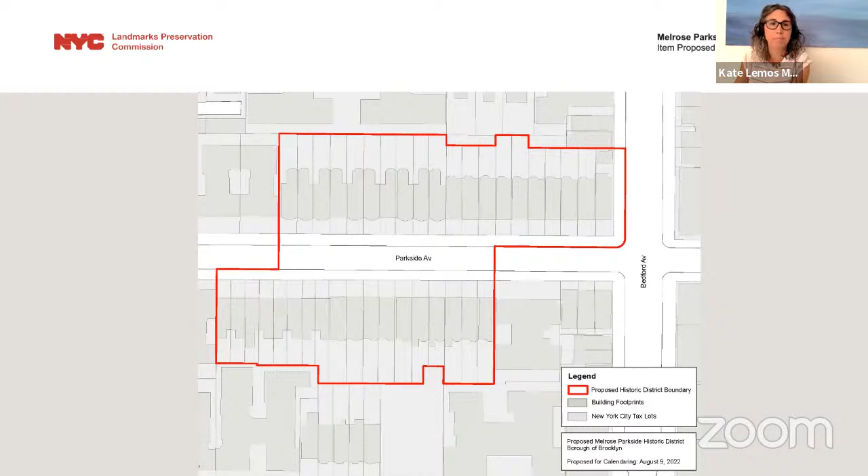The proposed district is located on Parkside Avenue between Flatbush and Bedford Avenues in the Flatbush neighborhood of Brooklyn. Of the 38 houses within the proposed district, 20 were constructed as two-family duplexes, sometimes referred to as Kinko houses, a distinctive residential building type that originated in Brooklyn, an example shown here on the left. The other 18 houses were constructed as single-family row houses. The proposed historic district has been identified through surveys and in response to a request from property owners to evaluate it.

This request was accompanied by letters of support and a petition signed by Parkside Avenue property owners. Staff reviewed it both on its own and within a broader study of the neighborhood. The in-depth study found that the proposed district stood out within the neighborhood for its highly intact architectural quality, and in particular for the group of Kinko house duplexes with their artistically designed facades, which we consider among the finest representations of the type in Brooklyn. In the staff's evaluation, the remainder of the block and adjacent blocks contain buildings in a variety of scales, ages, and levels of architectural quality and integrity, which do not contribute to a strong sense of place, and therefore we propose a district focused on the row houses, which you see here.

We held an owner meeting last year and have received generally good support from property owners as we've continued our study.

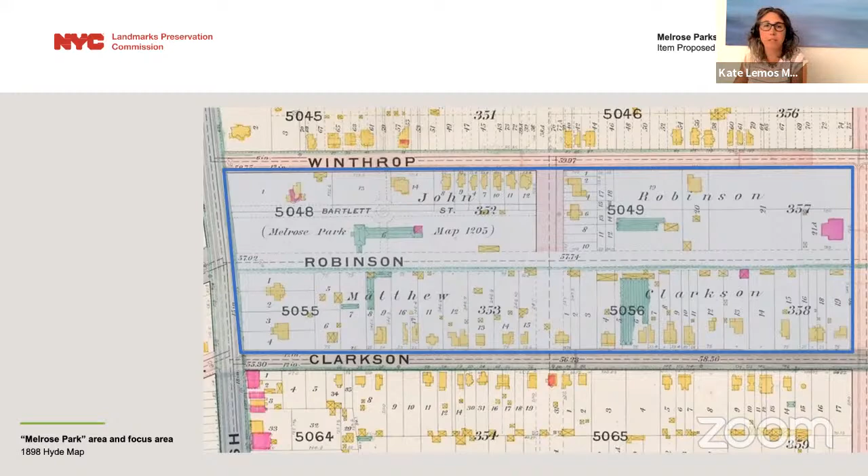The projected development went unrealized, and in 1886, Bartlett sold most of the property to the wealthy brewer and speculator William Brown. Already active in real estate development in Brooklyn, Brown's son, William Arthur Alexander Brown, began the transformation of the family's holding following his father's death in 1905.

Around 1908, the long-mapped Robinson Street was opened, and Brown petitioned the city to rename it Parkside Avenue for its connection to Prospect Park and Ocean Parkway. In addition to the 2 rows of duplex houses designed by Benjamin Driesler, which were completed in 1910, a row of single-family no basement houses by Driesler were in the process of completion in 1912, shown on this map also.

The undeveloped portion of the property on the north side was sold to developer Eli Bishop and Son in late 1913, and by 1915, development within the proposed historic district was completed there, with a row of American basement single-family houses designed by Axel Hedman.

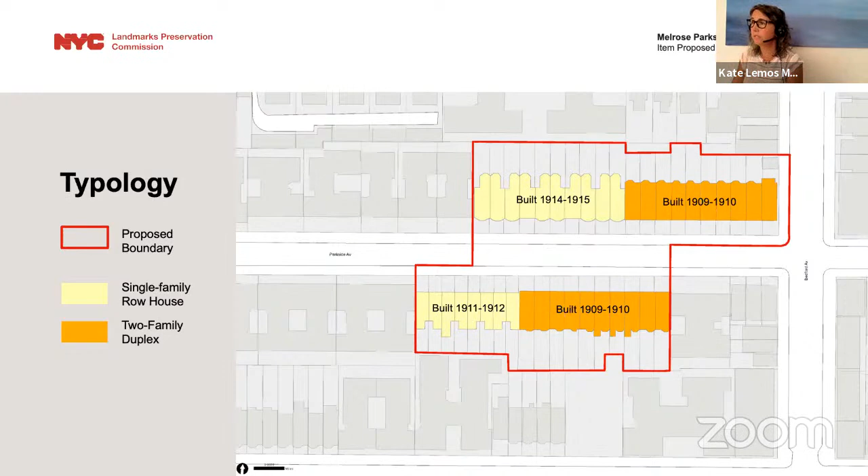This map shows the historic typology of the row houses, with the 2 rows of Kinko houses by Driesler built in 1909 to 1910 shown in orange, and rows of single-family row houses that were built subsequently shown in yellow. The apartment buildings on the block were built later for different developers and with lesser architectural quality and integrity, and so are not included in the proposed district.

Following a trend that was seen in other residential communities, some residents began sharing their large apartments with roomers, boarders, and lodgers in the 1920s. And beginning in the 1930s, many of the duplexes were being subdivided into multiple rental units or combined office residences for doctors.

By the mid-20th century, Flatbush saw a large increase in African-American and Afro-Caribbean residents as Black families moved into the area from other neighborhoods in New York, such as Central Harlem and Bedford-Stuyvesant. Central Brooklyn soon became the center of the city's Afro-Caribbean community, and by the 1980s was a major destination for migrants from Caribbean countries. Today, Parkside Avenue continues to reflect the diversity of Greater Flatbush.

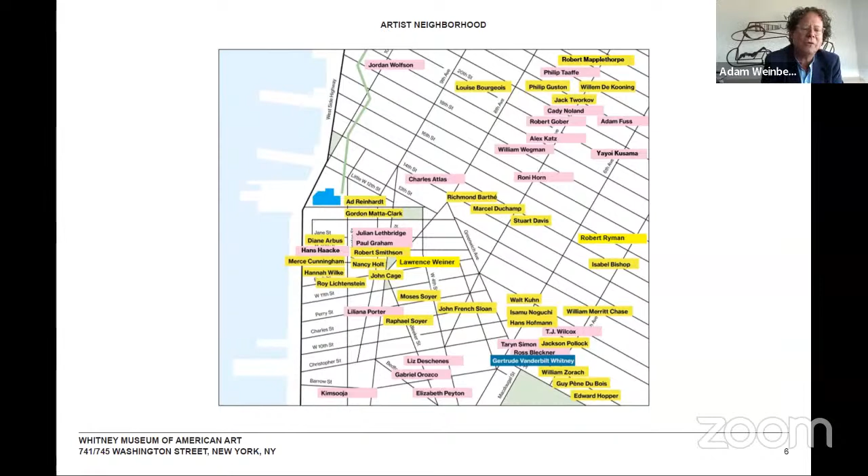Thank you all for the commissioners.

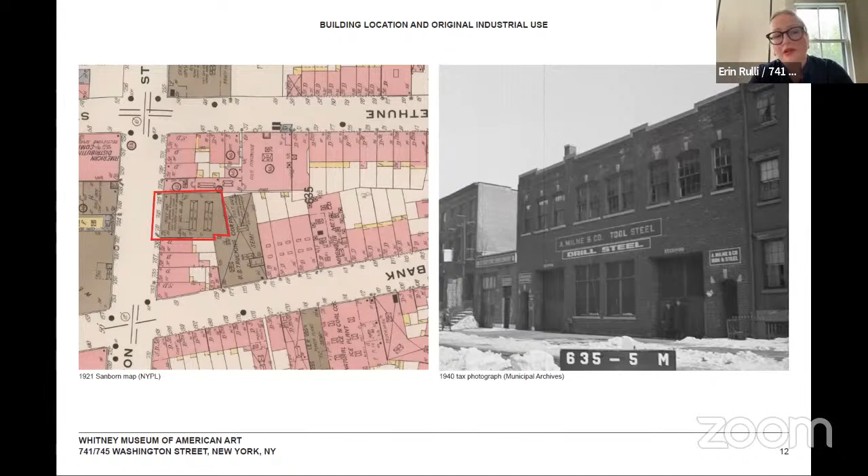Roy passed away in 1997, and since that time, the studio has been home to the Roy Lichtenstein Foundation.

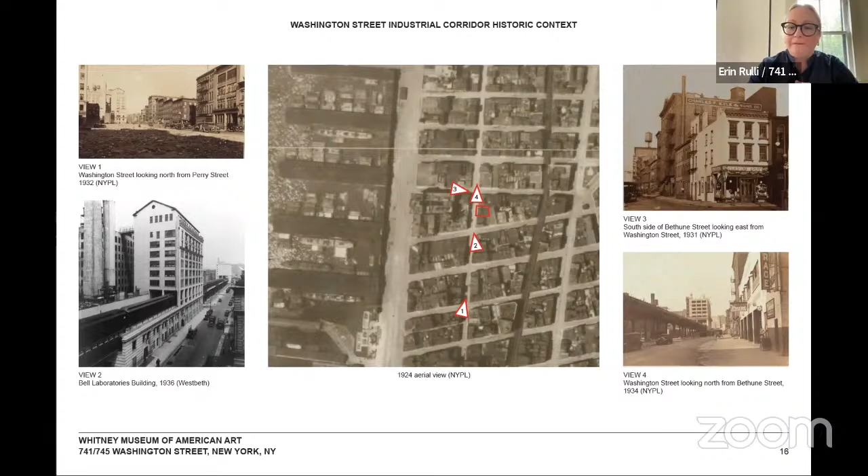I think what's important here is not just the characteristic juxtapositions that we see, but also that commercial building type is not defined by a specific size or scale, unlike row houses and tenements. So we see three examples in the very immediate context of that variety, and I think the addition at 741 does not fundamentally change the legibility of that commercial building type that we see here in great variation.

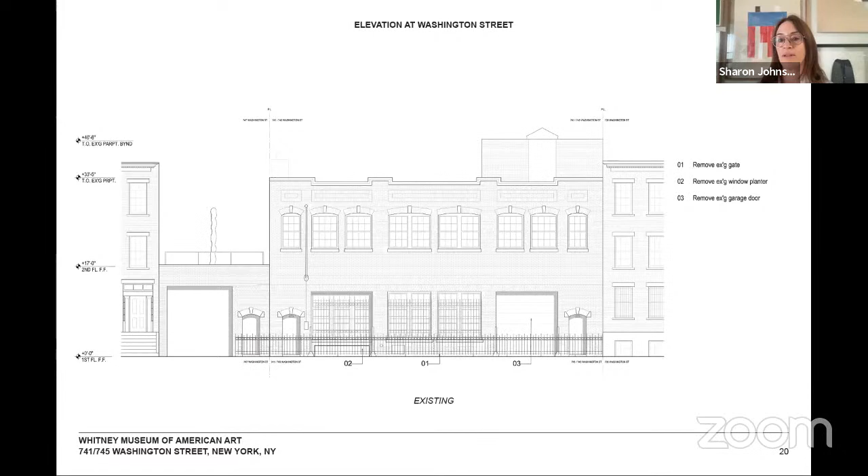Maybe as a way to summarize our thinking, captured in this diagram through four key strategies that we think bring harmony and find the right balance between highlighting and foregrounding the factory facade in relation to the addition. The first, in the upper left, is through use—we're bringing back and balancing the industrial use, used by Roy as a studio, with our proposal for artist studios on the ground floor and the single artist studio on the roof, sandwiched by the more intimately scaled, almost residential meeting spaces on the middle floor.

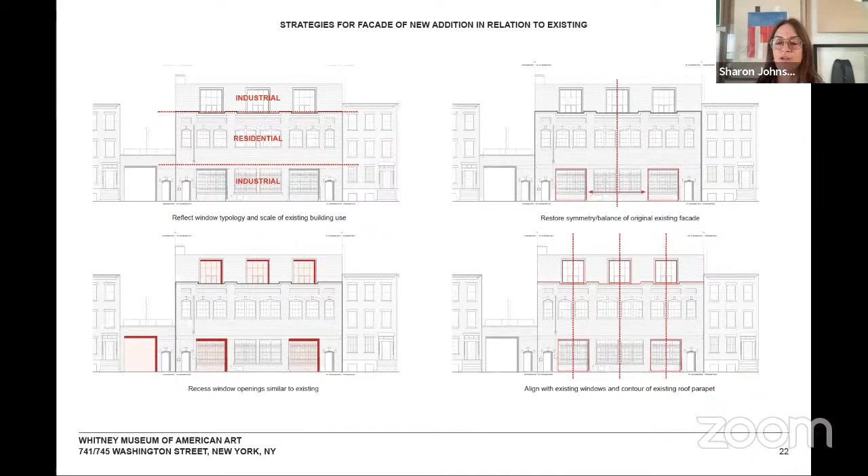That's represented also by the window scales Erin talked about. On the upper right, we bring back an order of symmetry at the base of the building by reintroducing the window on the south opening where the garage door was. On the lower left, repeating a language of recessed windows brings a sense of weight and definition, not only through the brick detailing but through the way the window sits in the facade. And lastly, on the lower right, while we want to preserve the predominance of the horizontal order of the factory facade, we've thought carefully about the placement of the windows, both functionally for the interior of the artist studio on the roof, and in the latent vertical order in relationship to the windows on the lower level of the building.

So if we could go to the next slide. As you've probably heard already, our intention is very much to preserve the lineage and legacy and texture and grain of the historic factory building.

We think our proposal achieves that through the way we introduce the massing. It's a simple elemental form, very much in the language of the existing residence and the industrial elements of the bulkheads, both in our building and some of the other spaces you see in the back of the blocks around this neighborhood.

Also through materials, we're proposing a brick facade, but a quieter brick that allows the texture and variation of the factory facade to remain foregrounded. We're introducing details around the window fenestration intended to respond directly to the function of this space as an artist studio, introducing ample light while balancing the need for wall space for contemporary artists who work in so many different mediums.

Next, I think Erin will walk us through these orienting slides that capture the mock-ups and rendered views, so everyone is clear about the position of the project in the neighborhood, and I'll follow up with some last details. Thanks, Sharon.

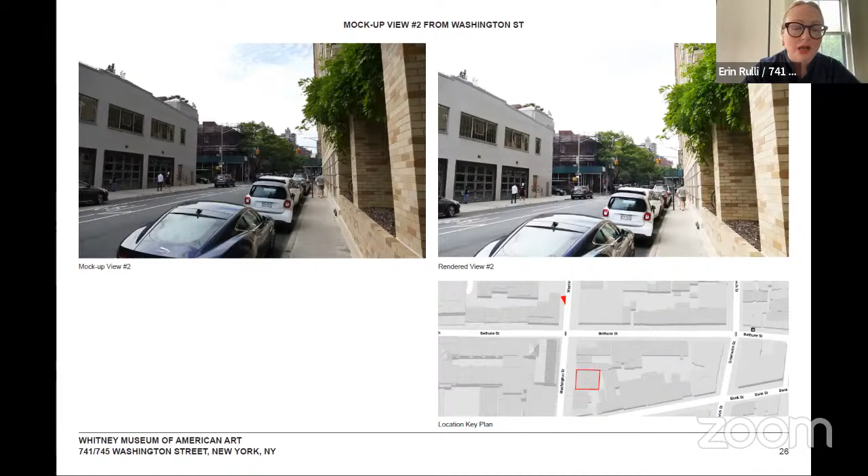Next slide. Moving a bit closer from the corner of Bethune, we see the addition again over the existing parapet line.

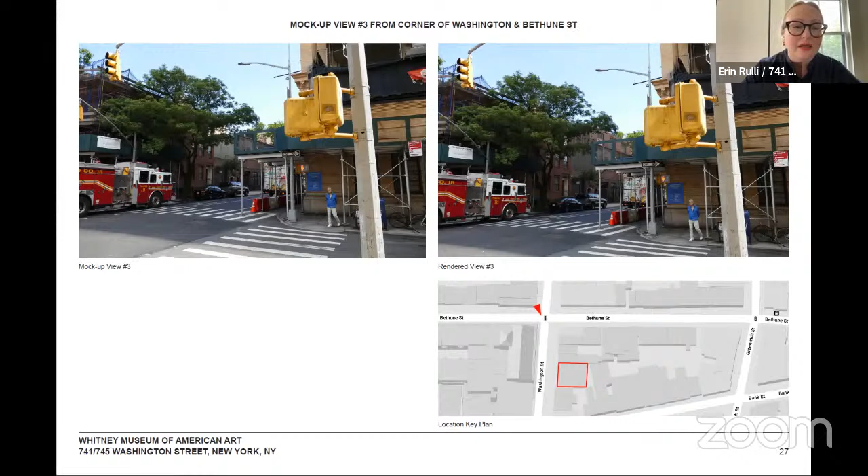Thank you, Erin. As much as we've been thinking about the internal order of the existing building, we've also been looking carefully at the context. What's notable for us is that this is an eclectic scale, materiality, and use. Westbeth is across the street, and it's that kind of variation that offers clues for our approach.

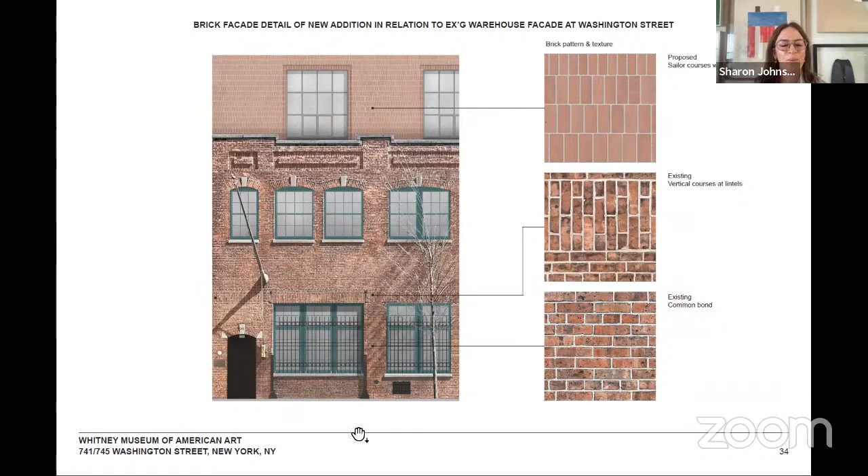You can see how the windows sit in relationship to that beautiful variegated parapet—right in the middle of it, finding that symmetry locally and overall. Also note the base brick is restored below the existing building, part of the subtle details we pick up on to bring back the clarity of the existing building. Thank you, next slide.

We've been studying the brick carefully, looking for a slightly more uniform brick tone to foreground the beautiful texture and vertical orientation of the existing facade, but we're looking for a brick with beautiful craft. It'll be a solid brick given our approach with the cut and vertical order we're proposing.

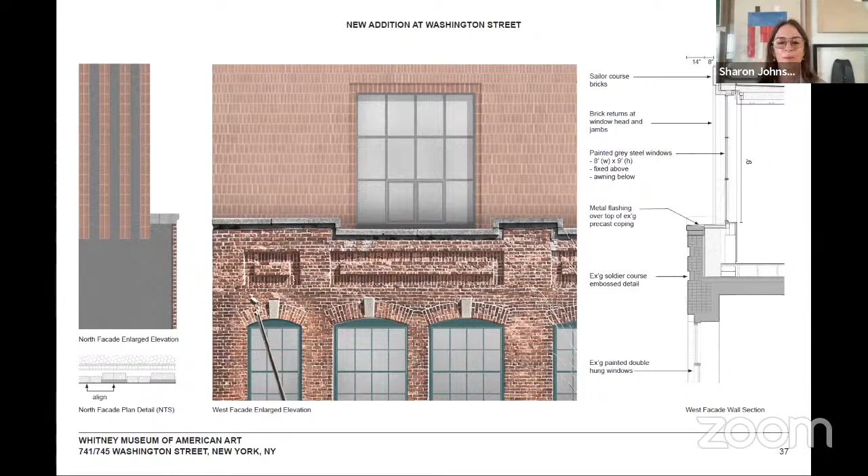The diagram on the left indicates a proposed further detail we're looking at on the north elevation of the studio, to articulate it as a massing sitting on top of that somewhat blind facade above the garage just north of our building. Subtle details that reinforce both the harmony and discrete nature of the addition.

Next slide, please. To highlight some of the points Erin brought up, as rendered here in darker gray, those are the existing walls. There was an existing residence on the second floor, and we've made a lot of effort to preserve that function—the bedrooms and bathrooms in the back—and located the new stair and elevators in the back of the building so their bulkheads are more discreet from the street. So what's on Washington Street on the west side is really just the artist working spaces.

We're extending the lineage of that second floor space below and preserving the open space of the green roof above the ground floor. Next slide, please.

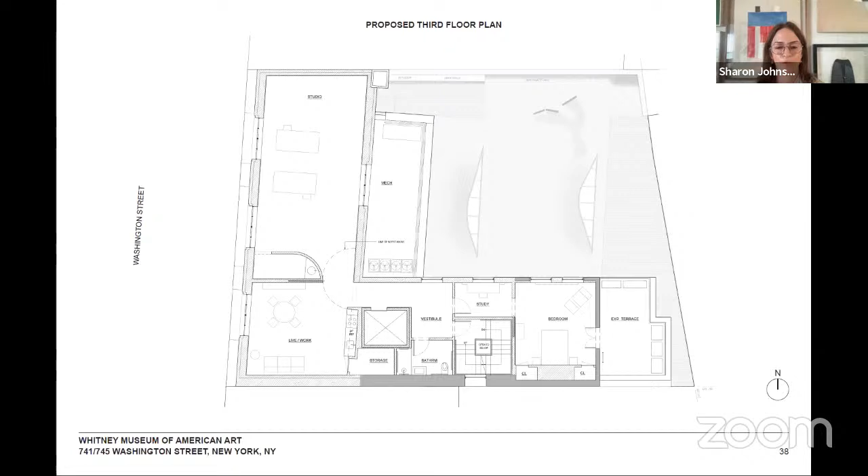Informal meeting spaces are on that middle floor, almost mirroring the residential scale of that floor. And then the artist studio sits on the rooftop. It's an 11-foot clear ceiling, which we think is modest by contemporary artist standards, but works very well within the overall proportion of the building.

Lastly, we made an effort to really simplify the placement of the artist studio for an economy of means, working with the existing structure and the bearing lines of that section.

I think just to conclude, our attempt here has really been to bring harmony with the diverse layers, not only of the building's history, but the urban context. We think by bringing this new contemporary use and building form, it fits seamlessly within the lineage, not only of this building, but also the evolving use of the neighborhood. So thank you very much for the opportunity to present to you all.

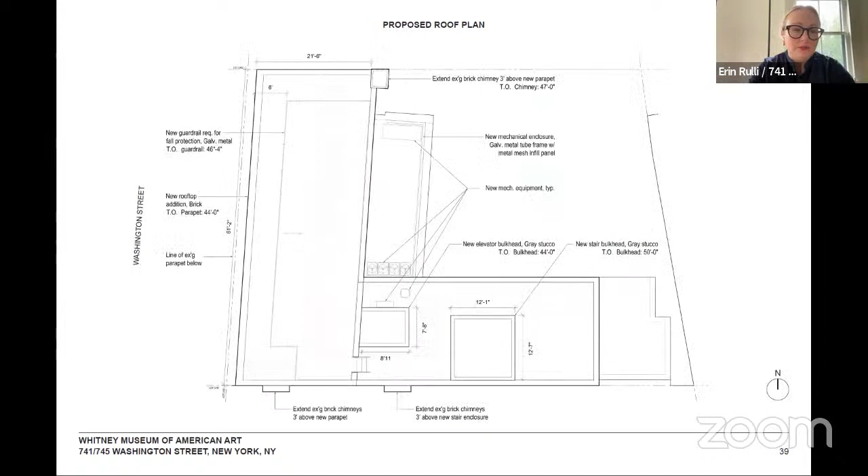This is elevated, so it's difficult to see how much of the addition is viewed from across the street, and I don't see that diagram anyway. I guess I would think of it not as a question about visibility, because it really sits just behind the parapet. It's really a question of whether it's appropriate to have a third floor on this building, and that's the way I would think about it.

I would assume that that third floor is going to be largely visible in its entirety, and we're thinking about this as a third floor to this industrial type building.

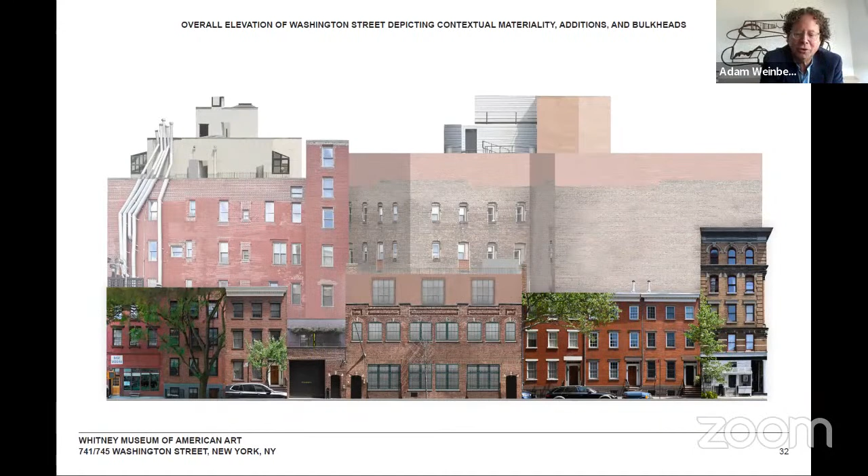You should know we gave a presentation at Westbeth for the residents of Westbeth and the neighborhood and shared a lot of these images with them as well. So we should disregard the block, the row itself, because obviously it breaks up the row. That's the concept, but I think you would be thinking about whether a third story in this context would be appropriate.

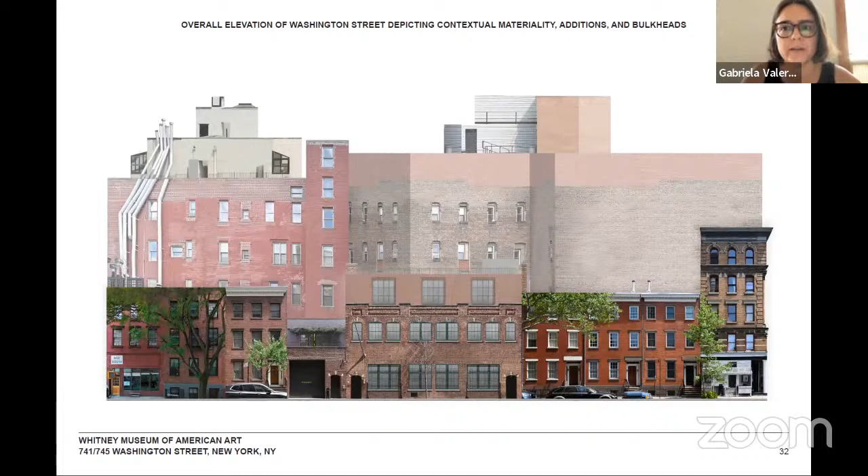Hello, good morning, everyone. My name is Gabriela Valero, and I am here on behalf of Annabelle Selldorf from Selldorf Architects in New York City. I will be reading her letter of support for this docket.

Dear Sarah Carroll and commissioners, it is my sincere pleasure to write this letter of support for the Whitney Museum of American Art's application for modifications to 745 Washington Street in Greenwich Village, to accommodate the building to be the permanent home of the Whitney's Independent Study Program, ISP. I am writing both in my capacity as an architect who has designed numerous similar projects in historic districts in the city, but also as a 20-year-plus resident of Greenwich Village.

I find Johnston Marklee's designs to be thoughtful, sensitive, and wholly in keeping with the character of the neighborhood in scale, materiality, and detailing. The scale of the rooftop addition is modest and driven by the new programmatic needs of the building, including providing ADA access to all levels of the building.

I am also particularly impressed by the very considered selection of the brick for the addition, including its color and coursing. The history of the village as a place of artistic production and inquiry is significant and legendary. Gentrification and changing development patterns have made it unaffordable for most working artists, particularly those at the start of their careers. I cannot think of a more fitting outcome than for the former studio of Roy Lichtenstein to be repurposed for the Independent Study Program.

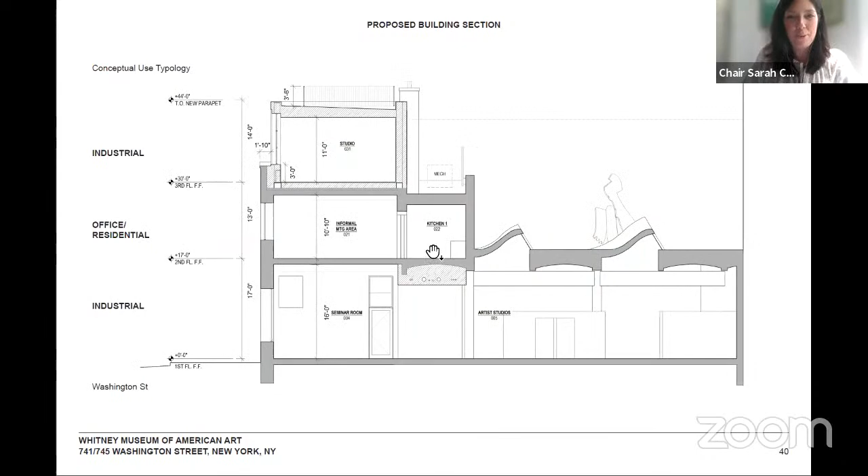I'm truly touched and honored by your words. And I just want a special thank you to Sarah Carroll and her entire staff who were incredibly helpful in giving us feedback in the process. Sarah, thank you for your leadership. Thank you very much. Thank you, commissioners.

Okay, we'll now move to public hearing item number 2, LPC 23-00186, an application for a certificate of appropriateness in the Borough of Manhattan, Block 41, Lot 7504, 70 Pine Street, the Cities Service Building and first floor interior, individual and interior landmark.

This is an Art Deco style office building with an Art Deco style interior lobby, designed by Clinton and Russell, Holton and George, and built in 1931 to 32. The application is to install furniture structures in the designated interior lobby spaces.

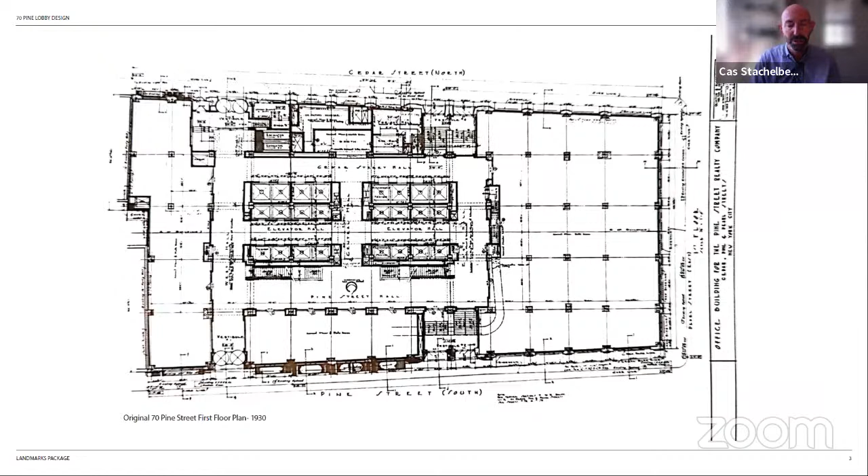The lobby and the building have been recently reclaimed and reinvigorated. Five years ago, the building was converted to residential use, with hotel, commercial, and food and beverage uses as well, so the building is once again a very active place.

The existing plan, as it is today, shown in green, outlines the designated space. The area of work is just in this southern corridor, but you can see there's a coffee shop, a small restaurant, an empty storefront that will help service the cafe, and a restaurant in this location. So there is, once again, front-facing, lobby-facing activity on the ground floor.

Some existing photographs give you a sense of the materiality and range of materials. The floor is a checkerboard pattern of two-tone marble, with remarkable Deco detailing across the walls, faceted cast aluminum storefronts, and a beautiful faceted plaster ceiling. A stair runs up along the south side to the second floor, adjacent to the area of work.

You can also begin to see the uses in the lobby: people passing through with strollers, walking their dogs, coming and going, sitting on benches drinking a cup of coffee. So it's becoming an active place once again, and the proposal really is meant to enhance that energy.

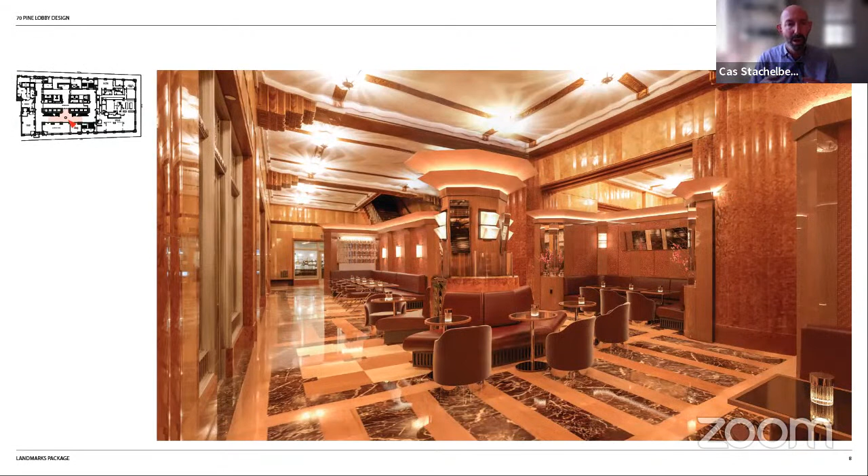Turning to the proposal, this is an existing view in the area of work looking east, in that south corridor, and then the proposal, which involves installing loose furniture, tables and chairs, as well as freestanding banquettes that have no physical attachments to the underlying historic fabric. All systems are fed through existing penetrations in the walls, and all of this has been designed in a reversible fashion.

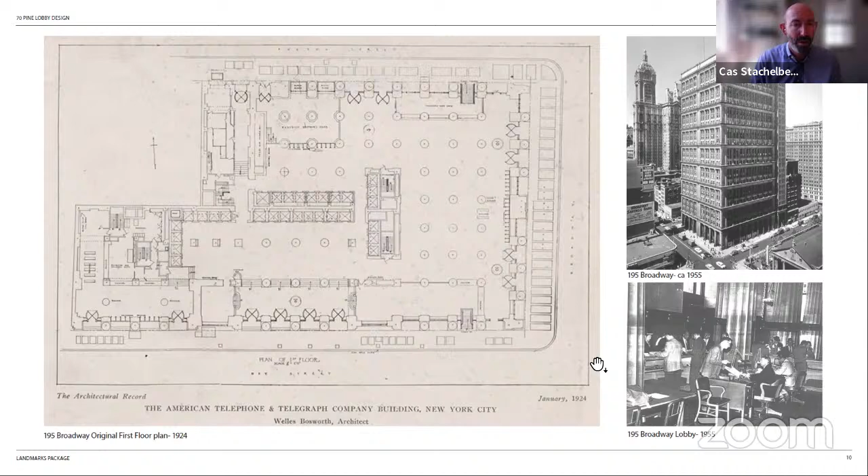This is more similar to the way 70 Pine Street operated, and the energy we're looking to tap into. We also thought it was helpful to look at the way the Commission has regulated some of these interior lobby spaces.

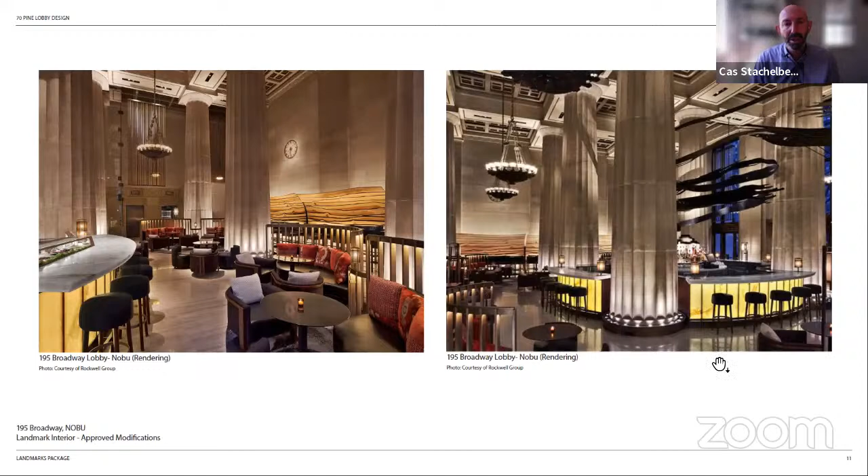This is the lobby of the American Telephone and Telegraph building at 195 Broadway, with renderings of the Nobu restaurant that is now open, where the Commission found it appropriate to have loose furniture, bar fixtures, tall partitions and banquettes along perimeter walls, suspended artwork, all intended to reinvigorate a space that was quite dormant at the time of designation. The Edwardian Room at the Plaza Hotel is another example, where commercial and retail uses through large fixtures have been installed to reactivate the space.

More recently, the Emigrant Savings Bank, where the Commission approved a large art exhibition space in the banking hall that's set to open next month. In the ancillary spaces, furniture and tall fixtures along the perimeter walls help support the new use within the lobby. So the Commission has acknowledged that installations similar to what we're proposing here in support of these new uses can be found appropriate given limited visual and physical effects or impacts.

Hi, I'm Reid, the designer for DTH, the ownership group of the building. I'm here to present the design and give you a bit more info on the details.

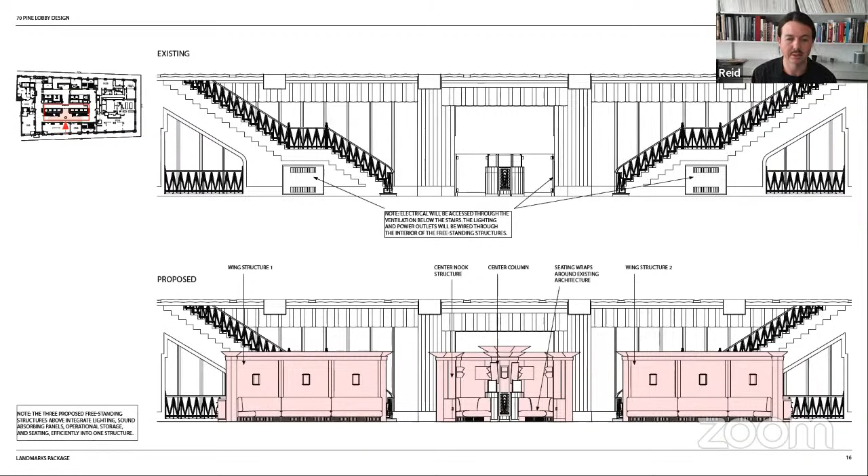Here we have a side-by-side view of the existing lobby with the proposed structure. As you can see, it creates that delineation while still keeping a view to the end of the hall. This space is very narrow, so it's important for us to have these views that extend throughout the lobby while still creating this intimate setting we've been discussing.

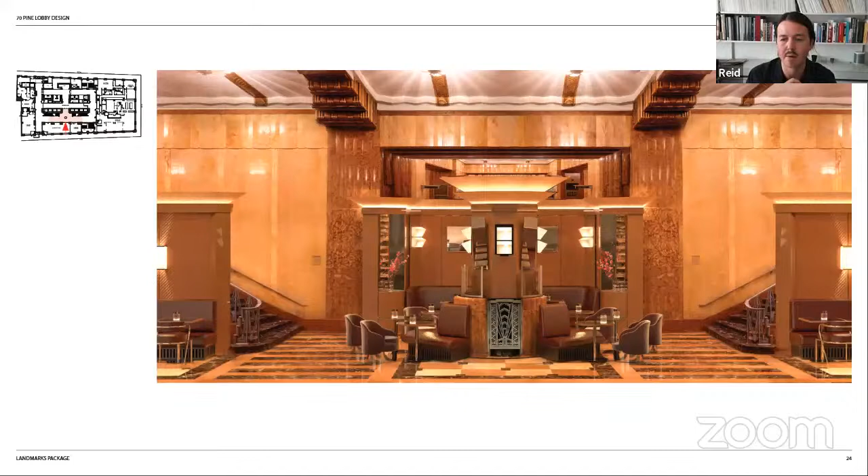Next slide, please. And here's the east wing structure.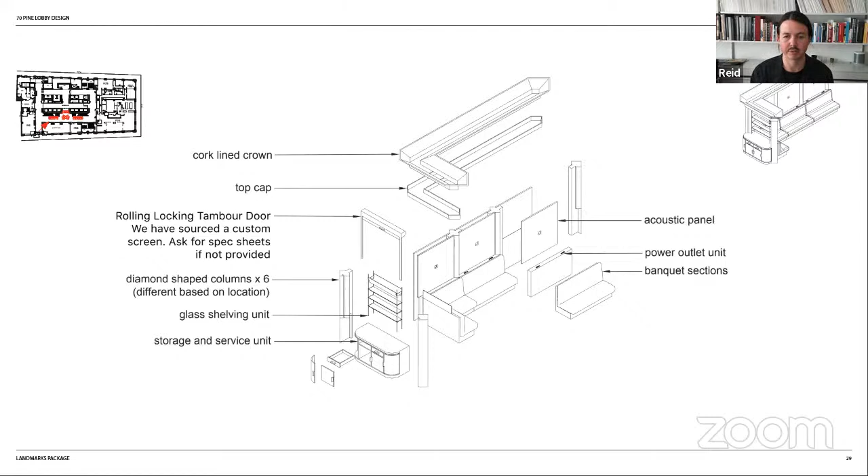Here's some technical drawings of the structures, to give you a sense of how they're built and assembled on site, but also disassemblable, allowing for reversibility. They're made of several parts manufactured off-site and assembled on-site, allowing for disassembly on multiple occasions, like being able to switch out different parts and pieces as needed.

Here's more technical views—I'll zoom by this a bit more to save some time, but if we need to return to any specific details at the end, we can in the Q&A.

And here's the two ends of the space of the proposal. In summary, these are freestanding structures. We paid a lot of attention to designing something that could be freestanding, but also delineate an intimate setting within the lobby, to be programmed for both the existing commercial tenants and the future cocktail bar servicing the area at night, as well as creating a public space that's nice to come hang out, work, or have meetings in.

This will allow us to bring life back into this lobby, which was bustling back in its heyday when it was built, which no longer feels like the case. We want to bring people and energy back into this space, and we think this project does a great job of doing that.

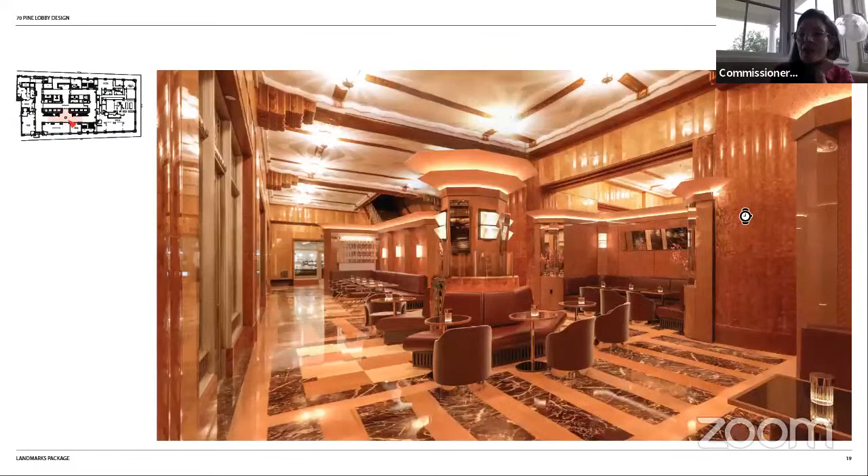So we have some freestanding furniture that is not mechanically fastened to the interior finishes in this one section of the lobby, and this furniture has sort of enclosures or walls to create a space within the space, with finishes that relate to some of the finishes in the interior space.

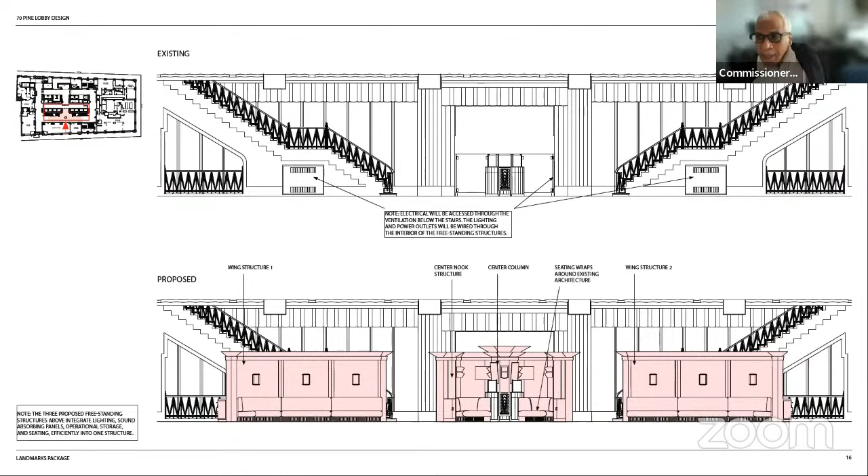The handrail is gorgeous, the stair is beautiful. I agree with one of the comments that perhaps if it was 5 feet, I could accept that as a proportion. So I think the scale of the rooms is too much for me. I would suggest that you do it in scale. Okay, thank you very much.

Commissioner Gustafsson: I think Commissioner Jefferson nailed it. It's this concept of putting a room in a room. The use of the Nobu space as an example did not help their presentation, because it is so conformed to and revealing of the space, as opposed to looking like something that's dropped in to block the views of the space. So I don't even know whether 5 feet would work, but this definitely does not.

Okay, thank you. Commissioner Shamir-Baron? Thanks. I do think that the view we have up here, the top image where we see that kind of symmetrical stair flowing down, is such an important view, even though you can't actually occupy that exact spot and see all of that probably ever. But I think it's very important, and the proposal in the locations where the stairs themselves are hidden or slightly obscured is where I find there is a problem.

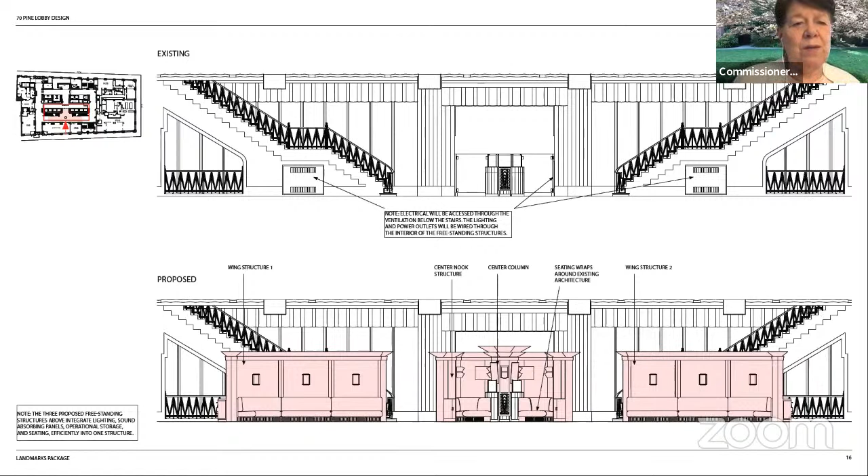I can approve the concept of movable restaurant furniture here, which I think is fine as a use. But these partitions are too tall, and I think they should be largely transparent, in which case you could see what's going on and it would not interfere with the perception of the space. The applicant talked about needing soundproofing, but that could be achieved with a transparent partition as well. So I think they should be lower and much more transparent, and that would achieve their ends and still allow the space to be viewed.

Great, thank you. And Commissioner—the lighting's okay. Okay, great. Commissioner Goldblum? Thank you. I agree with much of what has been said. The appropriateness of the furniture per se is for me acceptable.

However, the scale is completely inappropriate. I'll try to be as clear as I can about what I think are the lines across which this should not cross. Number one, no railing should be obscured. None. What that means practically is that the partitions come down to fit under the railings, and that the end bench closest to where the railings terminate should either become a flat bench with no back, or something else that reveals the railings. The railings should not be obscured.

Two, for me, the center nook, which blocks the view north to the center of the space, is inappropriate because it's blocking that view. Granted, it's not necessarily the most glorious view, but it lends to a sense of space and connectedness that the other changes approved in this lobby have diminished. So having a sense of the continuity of the space, even though multiple uses prevent access to all of it, I think is a very important aspect of earlier approvals and of the landmarks designation of the space as a whole as being a landmark.

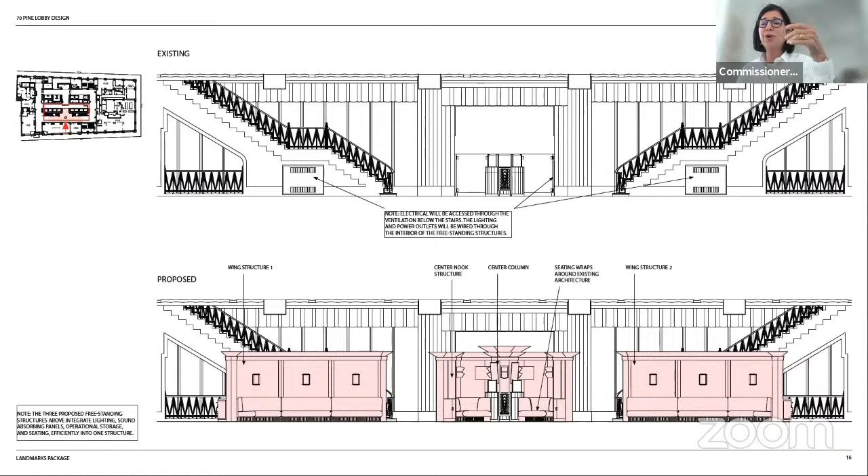Thank you. Commissioner Lutfy. I think all of the commissioners and also the other comments we've received have been right on. I do want to say I appreciate the fact that the applicant has tried to do this in a way to make sure that it's reversible and to tap into existing electric. And they've also been thinking about ways to mitigate and dampen the sound, which is very important in a space that has high ceilings and also materials that sound will bounce off of. But I agree with my fellow commissioners that there are different ways to mitigate sound.

I do think that by installing those walls behind the seating areas, it helps to obscure the wonderful details of the stairwell and the other architecture. So something else has to be explored. And I completely agree about the comments concerning the kiosks. I think that not only is the cornice too busy, but I feel like the whole top of that kiosk has to come off, and maybe it doesn't need the walls per se either.

I do feel like, as Commissioner Gustafsson said, the Nobu example is sort of a beautiful example of how you can utilize a space and accent it and add to it in a wonderful way, without masking it or competing with it. In that particular example, I think it works incredibly well. Also, what page was that? It was just two pages further, very understated. I think it was 51 Chambers Street, also worked very, very well.

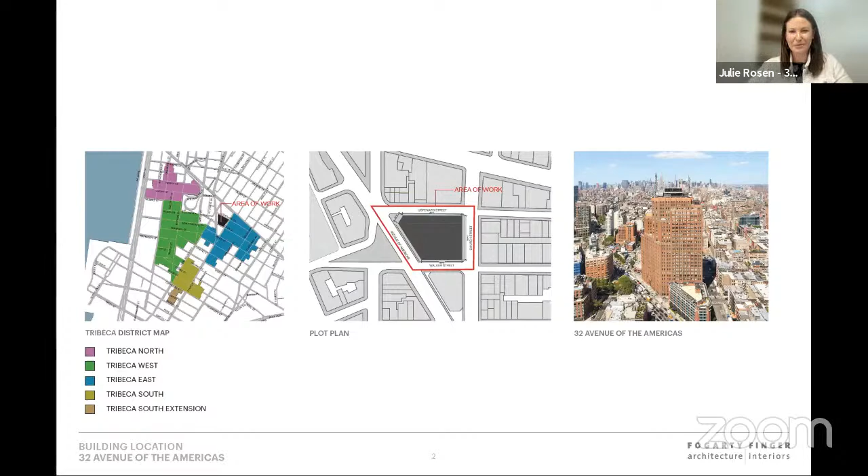The building was constructed in 1930 to '32 as the long distance building of AT&T, one of many telephone buildings designed by Ralph Walker in the Art Deco style during this early 1930s period. Walker constructed a modern interpretation of a skyscraper with a real emphasis on verticality throughout the building's design, with massive brick walls, punched window openings, and a central entrance portal on 6th Avenue. The building was very much designed for a single tenant, both inside and out.

At the street level, the exterior design was very solid, and this aligned with the interior uses identified on the original floor plan, which were all in service to the specific functioning of AT&T. Spaces were planned for a conference room, supply rooms, and even an employment office, and there was no retail along the base of the building. So many of these details and decisions that were once employed for the original single tenant use are no longer meeting the needs of the now multi-tenanted building.

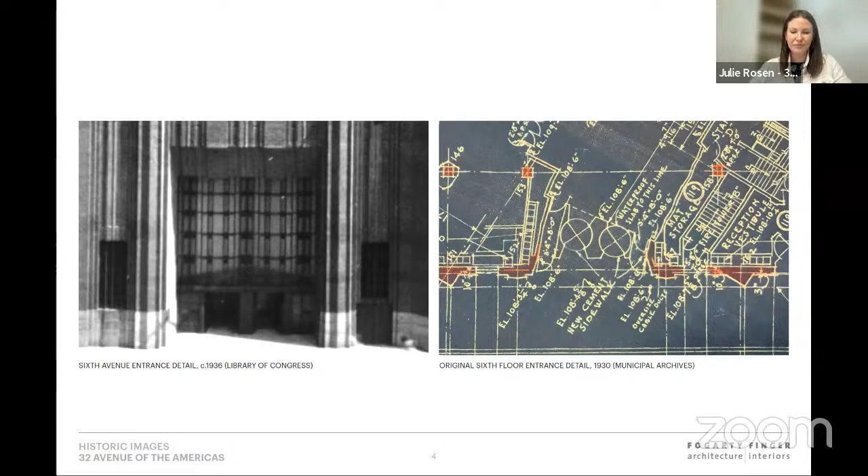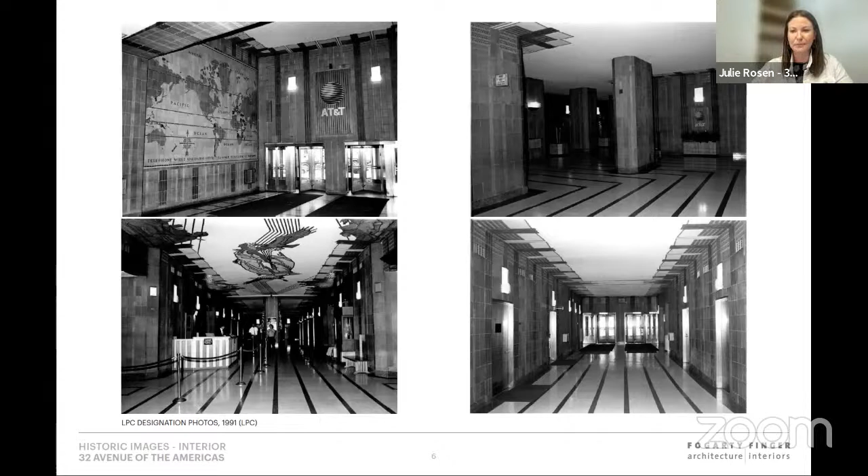The 6th Avenue entrance is composed of a tripartite assembly with a low row of brass swing and revolving doors separated from a large glass transom by a transom bar. The existing configuration with the numerous doors, solid metal, and tight vestibule immediately within creates a dark, closed-off entry that significantly limits visibility into and out of the space. The only natural light in the lobby actually comes in through these doors, and unlike Walker's other buildings, the transom at this building is an exterior light box, not an actual window.

All of the brass doors are very simply detailed with flat stiles and rails, and they contrast quite a bit with the grillwork of the transom, that beveled center pier, and even the richly detailed brickwork of the surrounding portal.

The existing infill does appear to be largely historic fabric, although there have been modifications made over time, including brass paneling and fasteners that have been replaced throughout. And perhaps the most noticeable change is the single swing door at the south end, which replaced two narrow double doors.

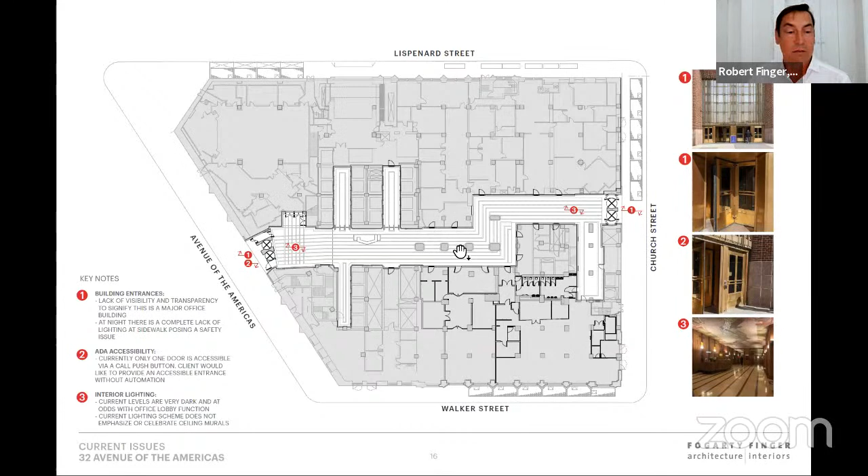This is a plan showing the lobby itself. On the left of the plan is Avenue of the Americas. On the right is Church Street. So that primary entrance shows at 1 and 2, and the secondary is over on the right. You can see that it's a fairly long corridor that folds in the middle, and there are elevator lobbies to the north and the south. The plan is a derivative over time. This building was built over time while being occupied, and there are some irregular conditions here in the lobby owing to that. We're going to talk about the doors first, and then the lighting condition.

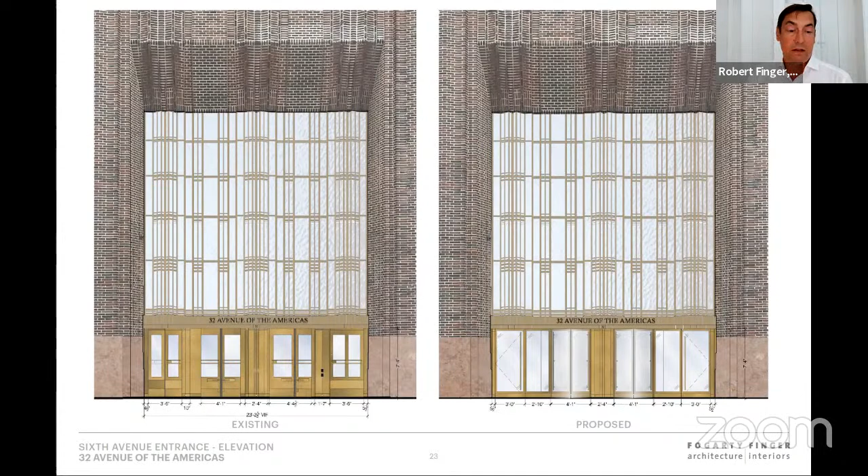So here is an elevation of what we are proposing to increase the accessibility and also the security at this level, and frankly, improve the visibility of the interior. We're looking at replacing the doors with larger glass doors, which we think will help with the transparency and visual accessibility of the landmark lobby inside.

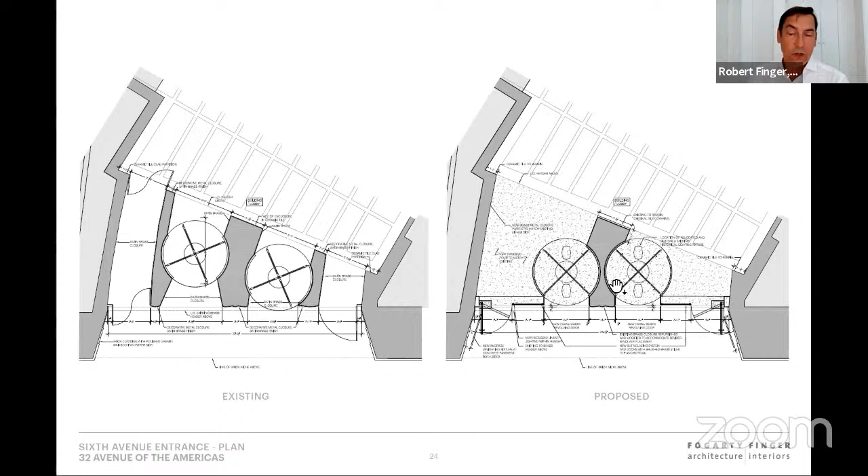We're proposing to change from 4 vestibules to 2. We're showing new accessible doors, right and left here. The one on the right will be designated as truly accessible and will have an actuator as well. The revolving doors are new, and we've oriented them to be flush with the 6th Avenue facade, as opposed to diagonal here on the other facade, on the existing part. We've also maintained an interior column and an exterior piece of beautiful bronze work that's existing here that emphasizes the vertical. We did not want to create one giant vestibule. We're maintaining the ceiling, the lighting, and the sidewall materials throughout this new twin vestibule that we've created.

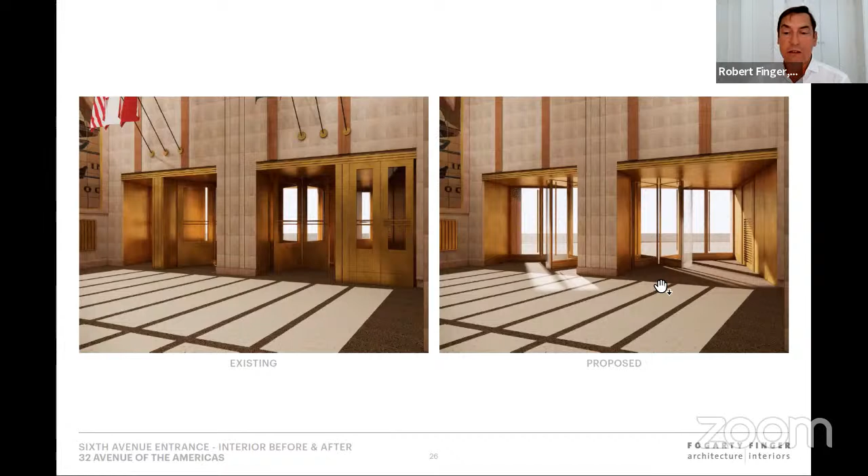We've got the 2 revolving doors in the existing condition, and then what we're showing in the proposed. Something that appeals to me in particular is that the lobby is open to the public. The building is really enthusiastic about handing anybody who walks in a brochure about the historic significance of the lobby, but it is visually impenetrable from the street. I'm hoping this will improve its accessibility to the general public. I think very few people appreciate that this is there as they walk by.

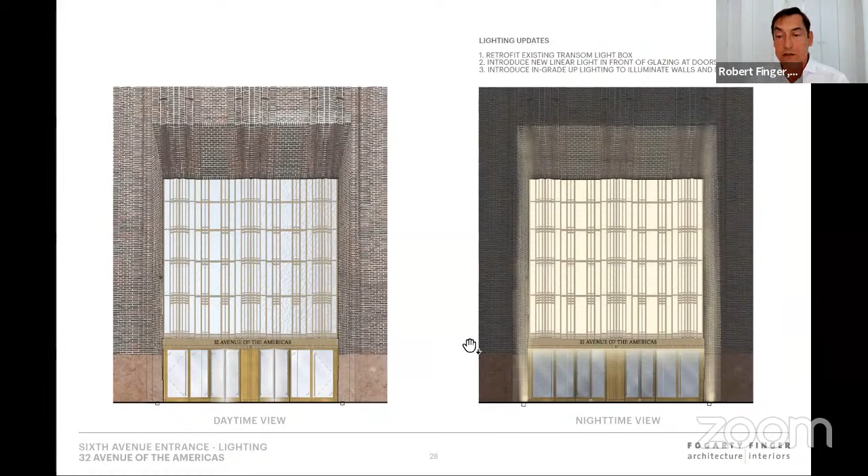We're also restoring and improving the lighting within the light box, which was done originally in the 90s. On the Church Street side, a similar approach: improved visibility, same bronze doors, proposing the same bronze doors. The signage we're continuing to look at.

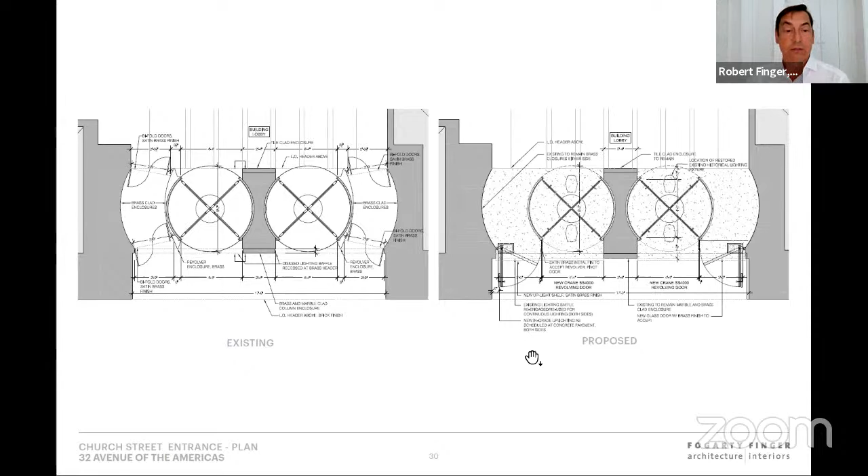Similar strategy to simplifying the vestibule conditions. Here there were already 2, and we will keep the 2. We're upgrading and improving the visibility, again going to single doors and improving the accessibility as much as we can. We cannot achieve true accessibility on this side.

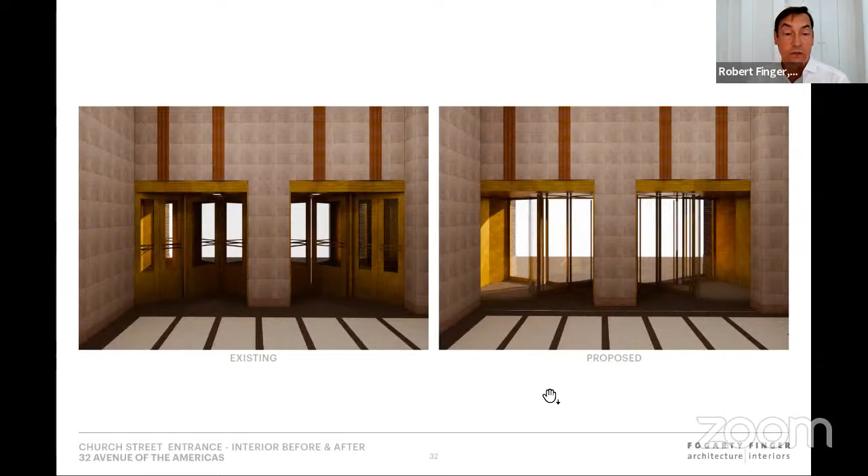Here's a visual of that. We're adding uplights in this case to help frame the interior with light of this opening, and additional lighting we're restoring that lights down onto the sidewalk. You can see the interior view here and the transformation in visual transparency and accessibility, and here's a rendering of the exterior.

Within the lobby, the Hildreth mural is really important to us and to everyone. It's spectacular. The fact that this is a woman who worked with Ralph Walker in many instances in this spectacular way speaks to the long distance company function of the building. I think it's significant that it's a woman, because the building was largely occupied upon opening in '32 with thousands of women who operated most of the communication devices.

They were also referred to, both in the LPC application and by another author, as weavers of speech. There's a border, which Julie mentioned, around the lobby, which seems to reflect a woven pattern, and it's speculated that was a venture by both Hildreth Meiere and also Walker.

Julie mentioned the lighting in the space. It's extremely dark from Church, and in this transformation, this little transfer area in the back. The light fixtures were increased in illumination back in the late 90s in an effort to improve the overall light level and the lighting on the ceiling. Honest to its original intent, they retained the indirect lighting. The problem is these light fixtures, once enhanced, are so bright that they take your eye away from what's happening on the ceiling and on the walls, and I find the contrast makes it even harder to see.

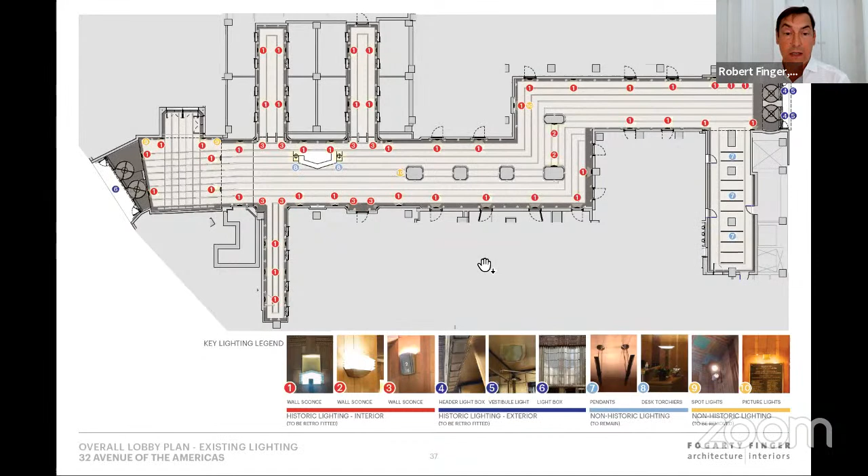We are looking to add lighting recessed into the floor. It appears to be a lot of these lights in the plan, but the intent is that they're fairly low illumination and very specific in what they do, as the space was originally indirectly lit. These tiles are spectacular and have not been touched, and the murals on the ceiling we'd never want to touch, so we eventually looked at lighting from the floor.

Here's the light fixture we're proposing. It is only 1.5 inches overall, and the interior light source is a fraction of that. This is a photo of a mock-up of the actual fixture with the dark bronze trim on the dark brown terrazzo, which comprises the border.

In the condition over by the mural in the front, the enormous mural, that's harder to achieve, that even level of light through these pointed light sources. And we're looking at a linear fixture, similar to the one on the exterior.

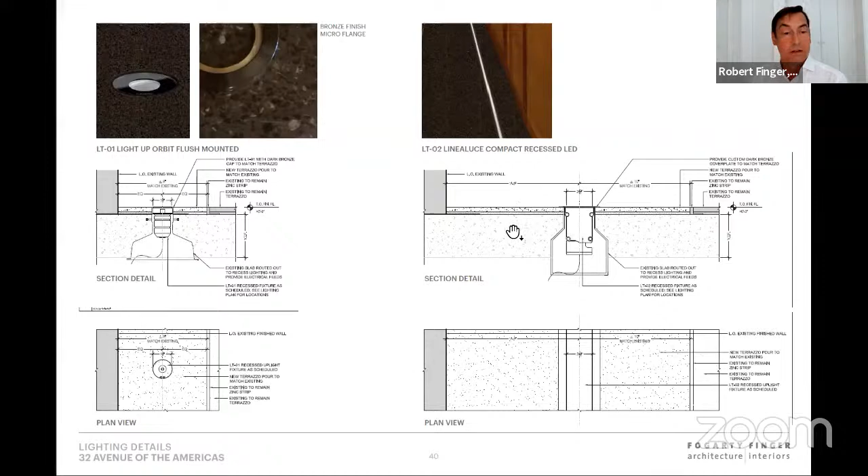In addition to adding these fixtures, which will be dimmable, we're also looking to re-lamp the existing fixtures and make them dimmable so we can adjust them to what we think will be the right level to complement all the conditions.

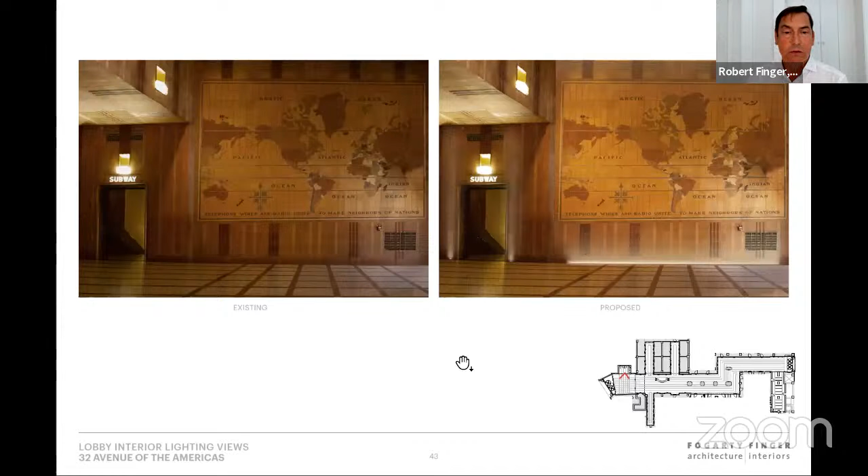Here's another example, photoshopped to show what we're doing along the sides. And an example here of what we're doing on the mural side. I think this mock-up was by far the most effective—it was really stunning.

I should add that with the bronze doors in the front, the owner intends to retain all of that so that we can restore the original facade if desired in the future.

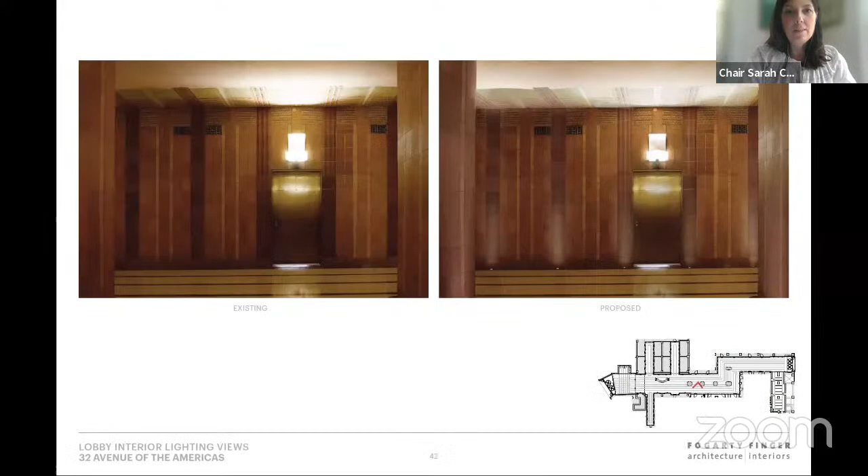There are two components really: the changes to the entrances and then the lighting. Just to provide some context before we kick off our discussion, the commission has approved modifications to entrances of our individual landmark office buildings, many of which were built for single tenants, to accommodate the need for multi-tenants and the flow, and in some cases other equipment that needed to be moved in - we have always allowed flexibility at entrances. For example, we've allowed changing a configuration of four swing doors to a pair of swing doors with mullions flanking them and doors on the outside, or changing out, which we did at the Bowery Savings Bank under a special permit on 42nd Street, or changing out revolving doors for swing doors, which we've done many times.

And also changing out the operable leaves of doors with heavier framing, replacing those with doors with lighter rails and stiles, as we've done throughout Rockefeller Center, for example. In all of those cases, while there were changes to the configuration or framing profiles and details, the commission found them appropriate because they worked within the historic materials palette and detailing. So that's something to think about as you think about this application.

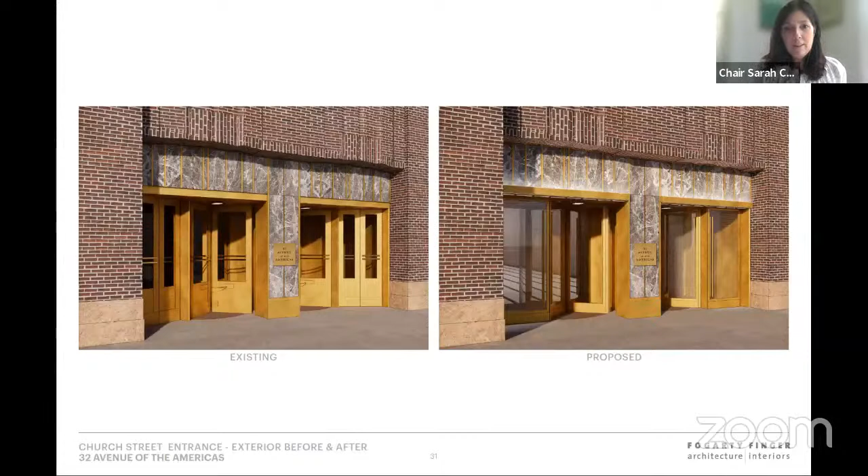Sure, if I'm unmuted. Okay. So, these...

These former telephone buildings, the AT&T building, the former New York Tel buildings, they're very interesting. Architecturally they're extremely interesting, but it's also interesting to me that, yes, they were all single-use buildings, and there's something always formidable and unapproachable about them, almost Darth Vader-like in a way.

It's interesting that many of them are being adapted to new uses, and it's a challenge to figure out how to maintain the architectural integrity of what's there, but make sure they function properly as they become, in some cases, residential buildings. In this case, it's a building that will continue to be an office building, but have multiple tenants.

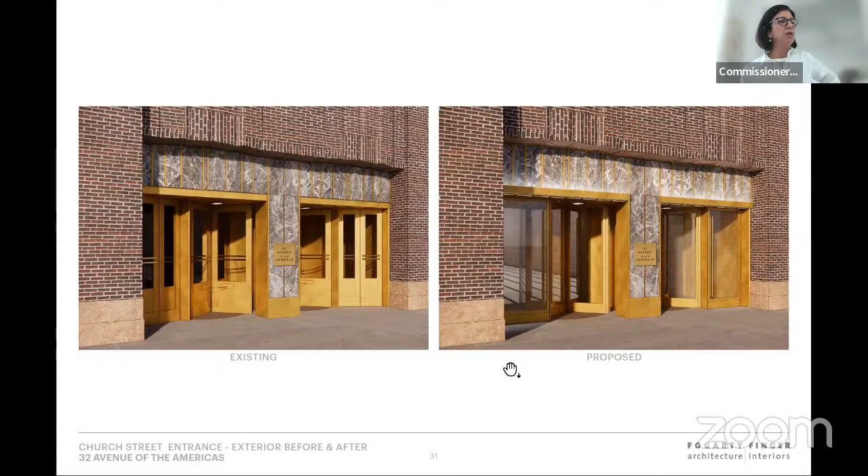And to add in a way that doesn't necessarily detract from the building's integrity and the integrity of the design. So, with all that said, I'm probably going to say something that nobody will agree with, but looking at the entry here - and I think this applies to all of the doors - if we could just move to page 29.

Is that 29? I have the front entrance as being 29, but it might not be. Yeah, that's it. I was trying to think of how to best consider this.

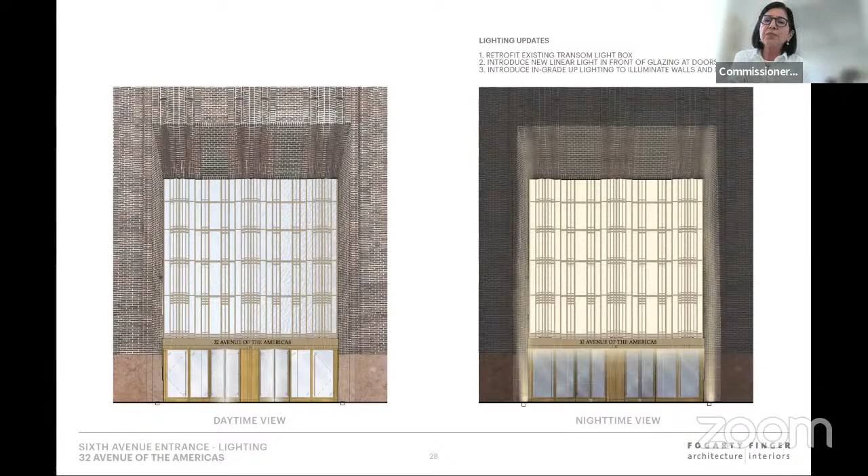I was thinking that when we try to problem solve our windows, and consider multi-pane windows versus 1/1s, we think about the architectural decorativeness of the building and whether or not the building can hold up if we get a little more spare in terms of the windows.

So I just try to look at this project from that perspective, because there is a new use here. We do need accessibility. And in looking at not only the framing of the entranceways, but also the transom and all of the glass and metal work above, I feel that the entrance can handle this without detracting from the architecture or diminishing it in any way. So I'm actually okay with it.

If some commissioners believe it might make sense to make the metal surround a little wider, I wouldn't have a problem with that. But I also appreciate the need to get light into this lobby, which is going to have a lot of traffic - and I agree, the lighting levels in modern lobbies today is much different - but there are beautiful murals in there and other elements that would be wonderful if a little light could get in for people to see. So I'm okay with this.

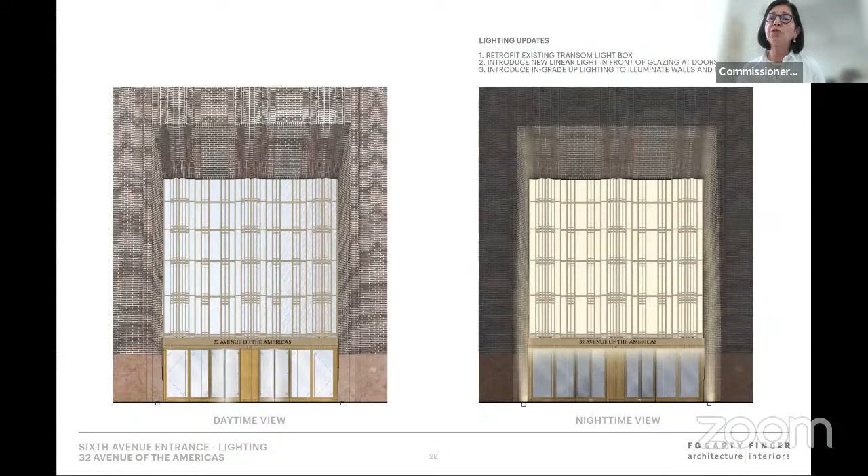In terms of the lighting on the inside, I appreciate that this is a difficult task for the applicant. You don't want to do the ceilings, you don't want to put the lighting on the columns. The terrazzo's easier to match, and the work on the floor can be relatively unobtrusive and understated. So my feeling is this is a good approach, and I would recommend the applicant work closely with staff to make sure the amount of lighting makes sense, so the lobby gets lit but it's not overlit, and it doesn't become something else.

So that's it. Okay, great. Thank you very much for those helpful comments. Commissioner Jefferson?

These architects are extremely sensitive and they think through a lot of issues, both programmatically and aesthetically. And this is a difficult one for me, because when they talked about the doors and accessibility, they didn't mention the lighting. They claimed they wanted more glass in the door to get more light in, but in fact, what they wanted to do was by lighting it, they accomplished that task.

The issue for me is that the existing doors, especially the bottom, is very strong. It's very powerful, the proportions are nice. And I could accept this if they had the handrails in, because the horizontal movement against all this vertical movement is quite a powerful element, subordinate but powerful to the organization of these doors.

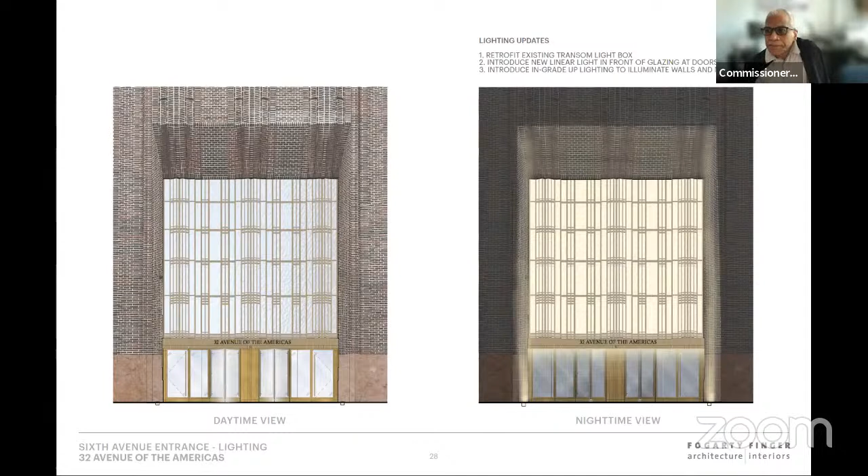Okay, so work with staff on the amount of lighting. And I guess I would say the quality of light is not something that we've traditionally been able to regulate or enforce, because it's so difficult to enforce. It's also not described in the designation report for the interior space. The designation report would speak to the fixtures and finishes, but not necessarily the quality of the lighting, as that's such an ephemeral thing. It may not be what it was anyway. So I guess that's a way to think about it as well.

All right, Commissioner Gustafson. Okay, with regard to the doors, we have two justifications here. One is about accessibility, and the other is about allowing light into the space. To the extent that it is necessary to replace the doors to acquire that accessibility, I can't object to that. But I don't think that's true.

I think most of this is about the light, and in terms of removing the significant Art Deco detailing of those doors, I can't support it if it's just on the basis of adding light to the lobby.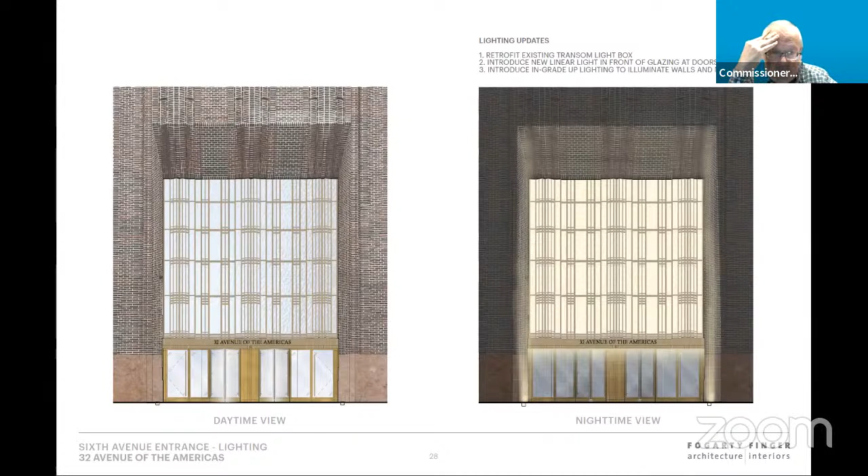So as it stands, I'm not in favor of the change in the doors. I think there is a unique beauty to these entrances, and those are features that we did call out. In terms of the lighting, I'm sure some additional lighting is justified, but I don't think the level at which the changes are being made here is justified.

Okay, thank you. And I do think, when we have approved changing the configuration of historic doors and entrances to individual landmarks, particularly office buildings, including making the framing thinner on doors and the glazing bigger, if it's done in similar materials and detailing—and in this case, as Commissioner Lutfy said, one could think of this entire monumental piece as the entrance. When you prioritize which parts are most robust or detailed and which are the most plain, those operable doors for me fall into that category.

And I think that the overall ensemble is strong enough that it can handle that. And also, knowing that we have done it at other individual landmarks, that gives me comfort, but I certainly understand your feeling about it.

Commissioner Shamir-Baron. I agree with a lot of the comments that have been made with respect to probably the original design intention. The building is meant to be, I think, cavernous and cool on the inside, among the variety and series of cathedrals to industry that predominated in the beginning of last century. So that kind of feeling that you have in a cathedral, even though in a cathedral the light and color from the light is another important aspect.

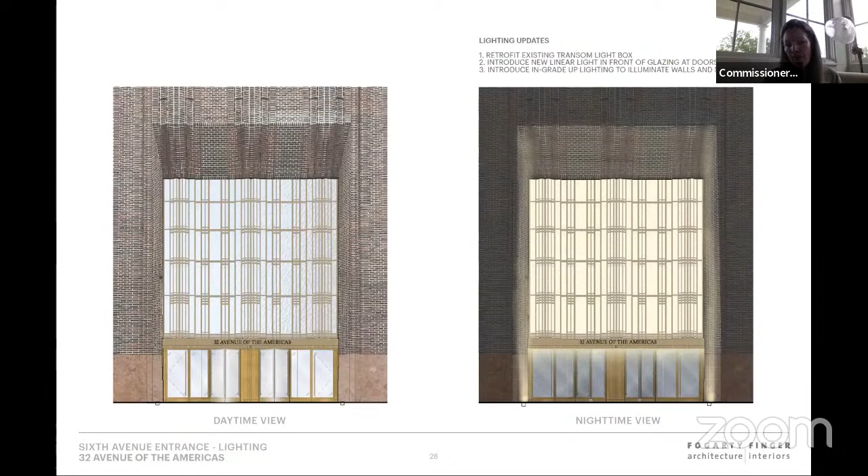I think that the proportion of this entry element is so grand and so weighted from above to below. In other words, the door elements are such a small percentage of that and seem to continue to remain under the weight of that heavy drapery of backlit, this one-sided glass, which is very interesting and a little bit strange.

I don't think that they suffer from being changed to what is proposed right now, meaning that removing some of that opaque material does not undermine the proportions of that entry and the continued feeling of weight as you walk in. So I think it's possible.

I think that there should be, and I can't quite tell where the datum line is from, if it is granite, the base of the building seems to have a number of different datum lines, and I'm wondering if those should be drawn. They seem to be currently an alignment between the granite, if it is granite, and the bronze bulkhead bottom line, but there seems to be another line as well, and I'm just wondering if that can be pulled into the bottom dimension that they're proposing.

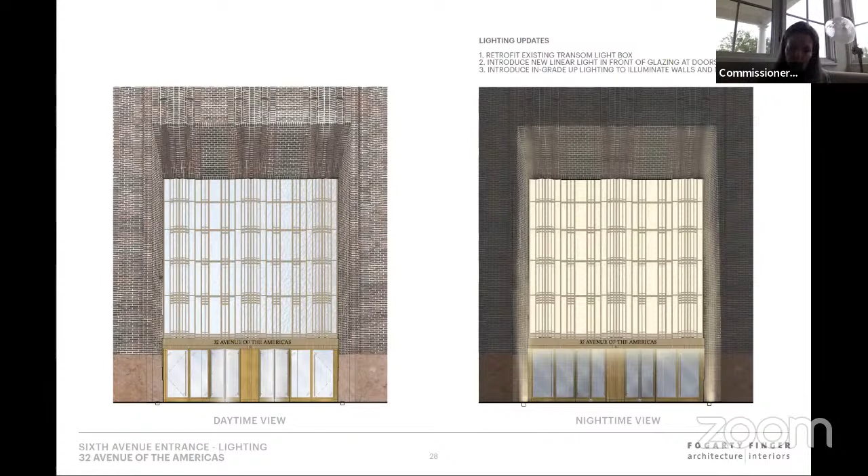Okay, great. Thank you very much. All right, Commissioner Chapin. Yeah,

I agree with many comments that have been made already, but I think that the lighting, it's appropriate to have some interior lighting. I would like the staff to work with the applicant to make sure that that is appropriate to the space and to make sure that there is some additional illumination for things like the murals, for example. I'll call them murals, but anyway, the depictions of the maps.

With regard to the doors, I feel that additional glazing is appropriate. We have permitted that kind of thing in some other comparable buildings. What I found most comparable from my perspective was the Empire State Building. And I feel that there is a need for some horizontal bar there. I think Commissioner Jefferson also suggested that, because these are very weighty doors, and I think that you shouldn't lose entirely the sense of verticality.

I mean, horizontality and weight, while adding some additional glazing here. So I guess that's really it. I can approve it, but with the provision they'll work with the staff on the lighting, and there would be some horizontal element introduced, like the push bars.

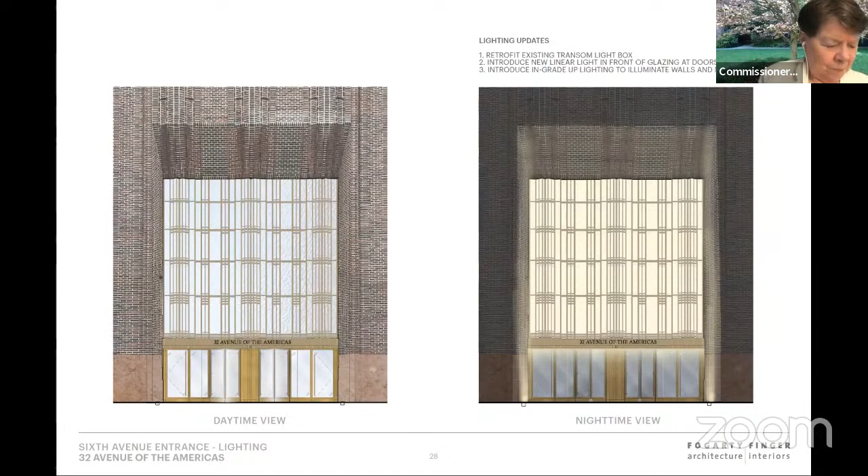Thank you. I think that Adi hit it right on the head with the lighting, interior lighting comment. Hugh Ferriss, all of his drawings are lit from some subterranean source, and they single-handedly defined the world's view, our view of the Art Deco period, of which this building is an exemplar.

So I also think that the lighting proposed on the interior is not going to make these spaces have a modernistically lit quality. They are very focused, very narrow, wall washing and ceiling hitting in narrow places fixtures. They are not overall general area lighting. They are not uplighting in a kind of space lighting sense. They're very much accent lighting, which is completely appropriate to, I think, this kind of space.

And I agree that the terrazzo is easily repaired if technology changes and for some reason they want to change it. I don't think that that's a problem. We've allowed limited holes in terrazzo for electrical devices in the past.

I think that the comment about adding horizontality to the glazing at the entrances is right on the money. But I don't think that it would in any way diminish the ability of the architects to do what they want to do in terms of changing the doors, changing the vestibules, increasing the overall glazing and visual penetration into the space. I think it would just be a nice decorative element.

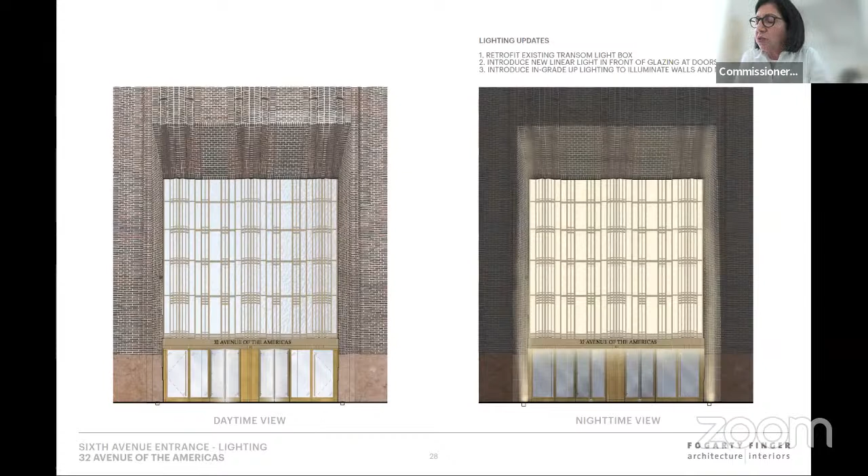Okay, in the matter of docket 23-00178, 32 Avenue of the Americas, long distance building of the American Telephone and Telegraph Company, individual and interior landmark, an Art Deco style skyscraper with an Art Deco style interior lobby designed by McKenzie, Voorhees, and Gmelin, built in 1911 to 14 and enlarged in 1914 to 16, and again in 1930 to 32 by Voorhees, Gmelin, and Walker. The application is to alter entrance infill, install exterior lighting, and install floor-mounted lighting within the designated interior lobby.

I recommend approval with modifications, finding that the proposed replacement of the existing entrance infill on both 6th Avenue and Church Street will provide barrier-free access and will increase the penetration of natural light into the vestibules and lobby and visibility into the landmark space, that the new entrances set within an existing assembly dominated by monumental transom and surrounded by more prominent masonry elements will feature simple and clean contemporary infill, and the proposed work will not detract from the significant or prominent unifying features of the building design.

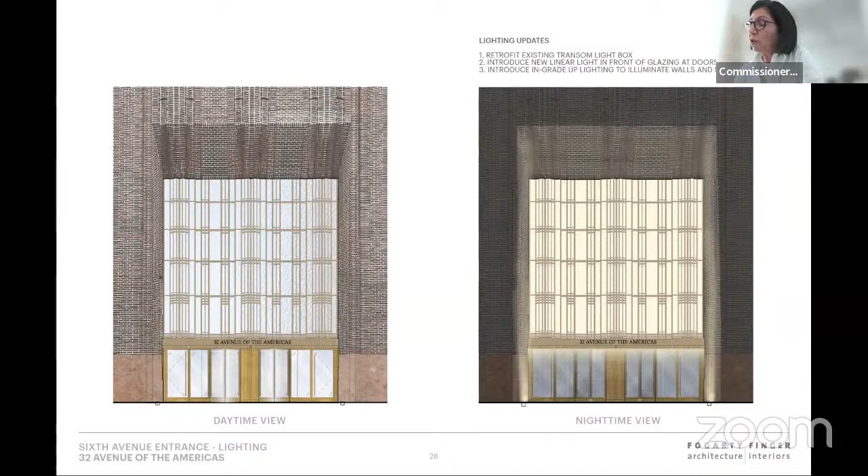That the design of the proposed entrance infill, featuring glassy revolving and single doors within thin brass framing, will feature materials and details that relate harmoniously with the facade and maintain the composition of the historic entrances. That the light fixtures affixed to the building at the entrance portico will be simple in design and proportionate to the entrances. That the lighting installed in the plain terrazzo flooring in the interior landmark will not damage historic fabric, is unobtrusive, and will highlight the special murals that are poorly lit presently, thereby enhancing the landmark space. And that the work will not detract from the special architectural and historic integrity of the individual landmark or interior landmark spaces.

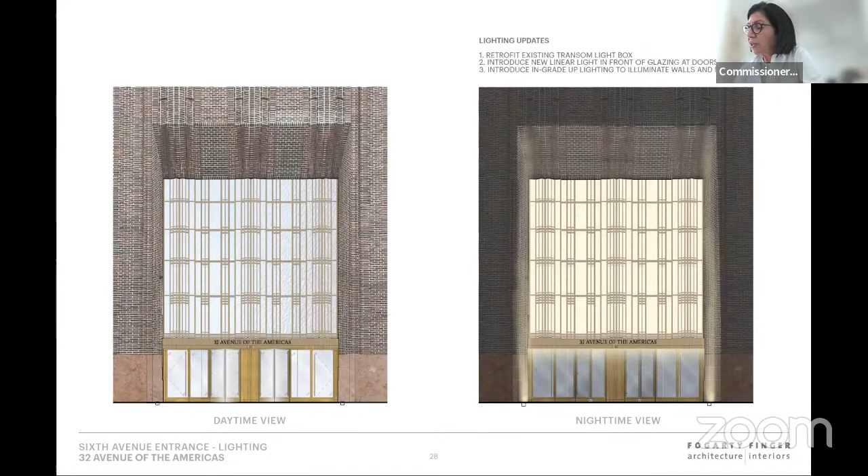I recommend though that the applicant work with staff in two areas. First, in terms of the front doors, to install a horizontal push bar-like bar, working with staff, similar to the existing condition, to be in keeping with the proportions of the Art Deco elements found at this landmark, and to also work with staff to study the bottom of the doors in terms of its datum. In addition, in terms of the lighting, I recommend that the applicant work closely with staff on the number of lights and on the level of lighting that's going to be installed.

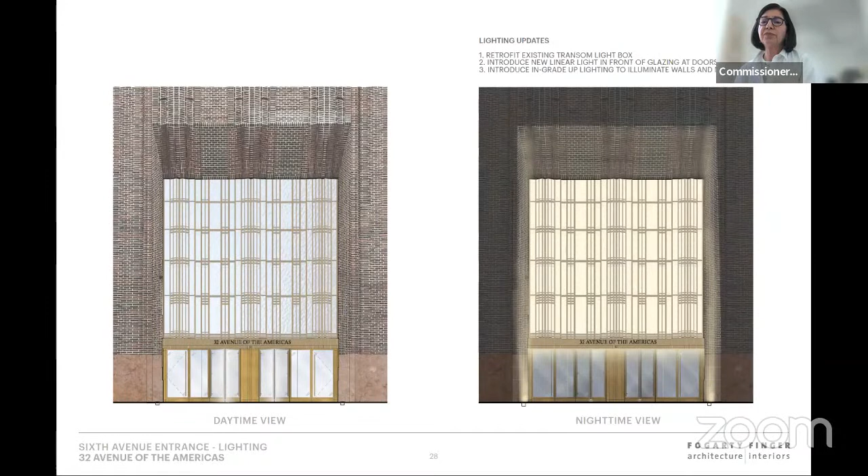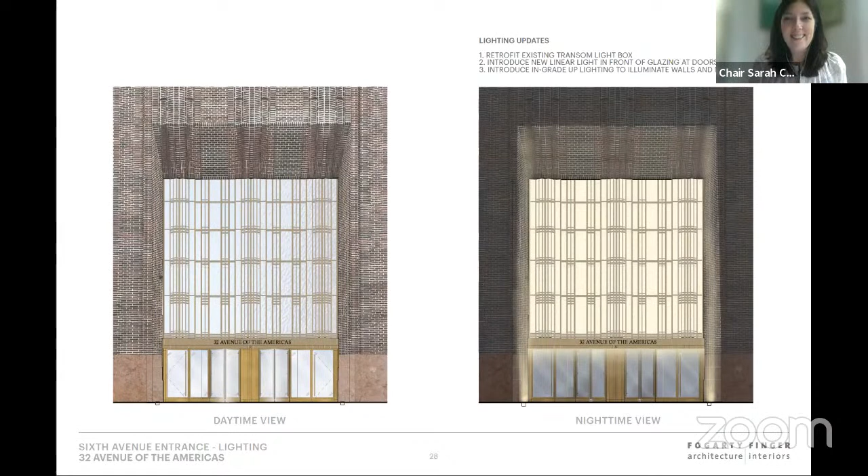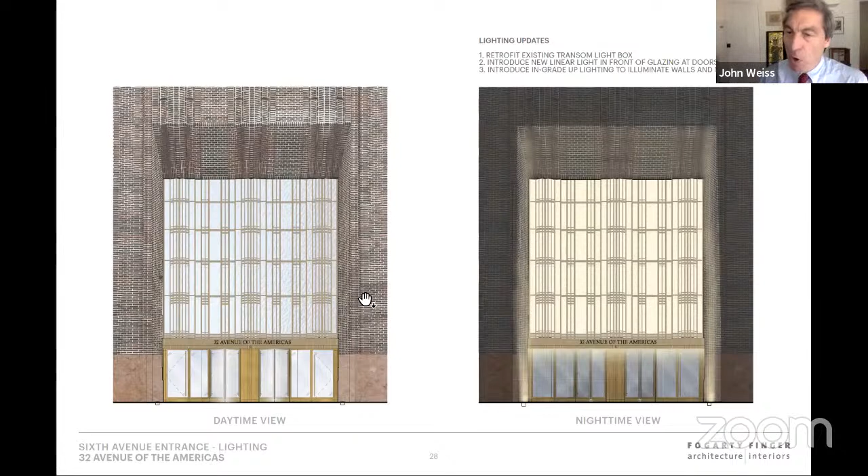Chair Carroll, aye. Commissioner Bland, aye. Commissioner Shamir-Baron, aye. Commissioner Chapin, aye. Commissioner Chen, aye. Commissioner Goldblum, aye. Commissioner Gustafson, nay. Commissioner Jefferson, aye. Commissioner Lutfy, aye. 8 in favor, 1 opposed. The motion passes. Right, so that's approved.